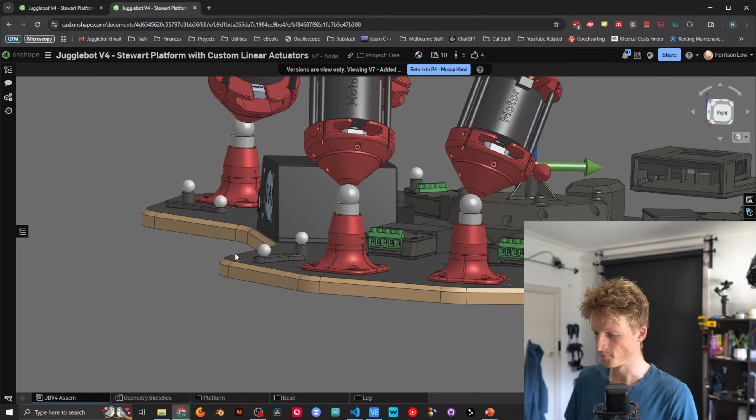And there's one spot in particular where the slop was particularly bad, which was the quick release joints that I had between the leg and the base. And to show you what these were, this is what they were like before. Well, actually what they currently still are now. So on each of the legs, I'll explain why I decided to do this in a sec, but

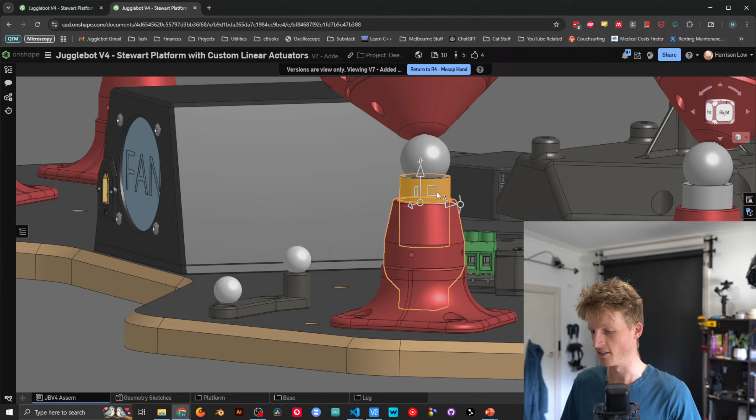for now, these legs are all attached with this magnetic joint that attaches the leg to the base, and then to attach the female part of that magnetic joint, I've got a little holder thing in here, and then that attaches into the actual base with just a single screw, which the hole is around here. So through there, a bolt goes in, and then attaches this guy down into the base.

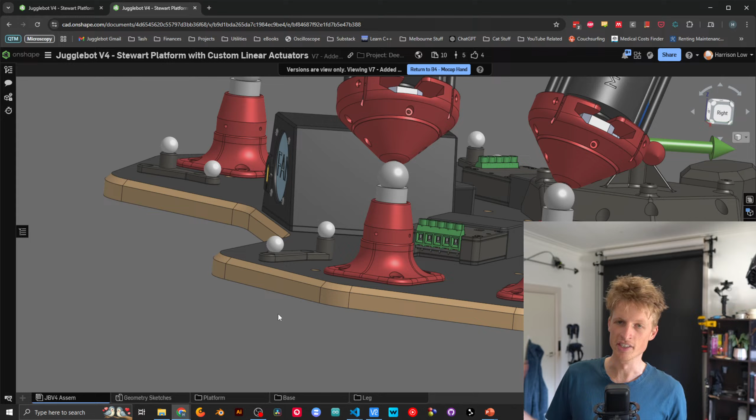And so the reason why I did this initially was because a little while ago, probably almost a year ago now, maybe even more, the geometry of the robot was changing quite a lot. So I was relatively frequently changing where the legs were positioned and how they were attached, and also changing the geometry of the platform itself. And because I was going through all of these changes, it was really annoying to have to continuously screw and unscrew a whole bunch of different spots.

And I wanted these legs to be able to come in and out much faster so that I could more easily make those changes. But of course, there's been so many instances where previously I was designing something specifically for modularity, but as soon as I got the modular design done, I stopped making changes, which is so frustrating.

Yeah, I kind of wish that I did the modular design at the very beginning, and then I could actually benefit from that modularity, and then at the end, once I settle on a design, I ideally would have come up with a rock solid final idea. I guess that's just the way it goes though.

So yes, since I made these joints, I haven't done anything with them. And perhaps unsurprisingly, because there's only a single bolt attaching these guys into the bottom piece, there is a non-zero amount of slop in there. And of course, because these are all 3D printed parts, in here I've had to add a little bit of tolerance. So particularly wobbling about this axis through here, there's a little bit of jiggle in there.

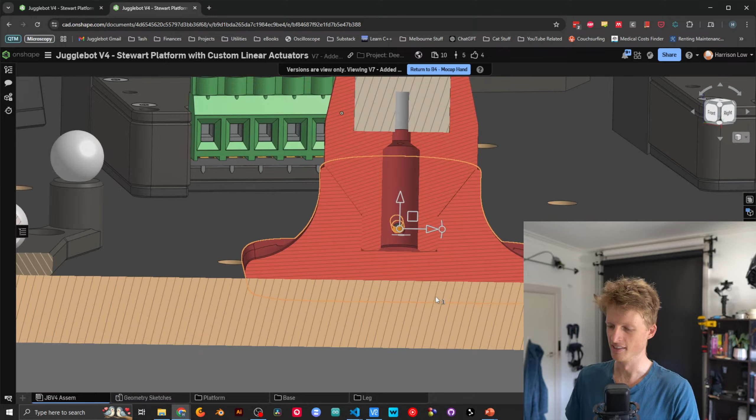Yes, that's no good. So I am now replacing them with these guys. And it's essentially the exact same thing, except this is all one solid piece now. So if we have a look at the cross section, we bolt straight through the red piece, the printed part, into the female magnet bit, and then that goes straight onto the base. And this should be a lot more solid.

I haven't changed these over yet though, because my printer is slow and it takes a bloody long time to print these all off. So I've already got 5 of them, and the 6th one is printing right now. I apologize if you can hear it. I was trying to get it done before the stream started, but again, my printer is very slow.

So yeah, later today I'll replace these over, and we will hopefully be, maybe not completely, but more rid of slop than we were before. As far as I can tell, these are the biggest offenders now, but they are still way less than the platform joints were before. So in that regard, definitely progress.

But I'm not actually too sure how big of an effect this slop is going to have on the testing that I'm doing right now, because all the testing involves moving the platform to a given spot, pausing there for a bit, waiting until we're certain that the platform's not moving anymore, and then continuing to the next pose. So I'm not sure how much slop would actually affect these results, but it definitely would affect the dynamic results. But yeah, I think that's definitely a step in the right direction.

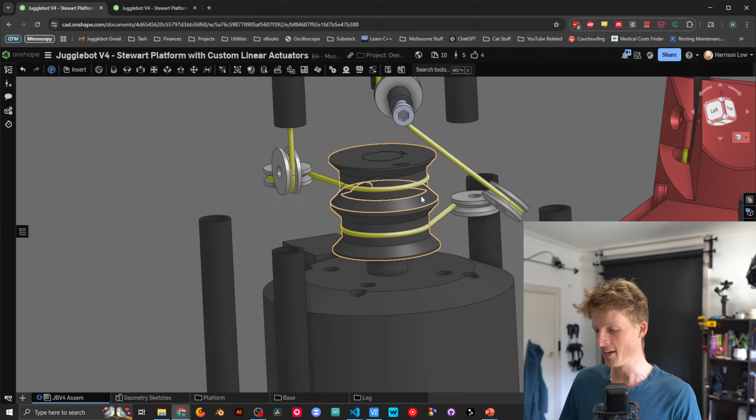Although I haven't gone through and updated this yet. Actually no, I did update it. Yeah, this is correct. So this spool is nominally 22 millimeters in diameter, according to the CAD. However, the effective diameter that the string actually follows is going to be slightly larger than 22 millimeters, assuming that the spool actually is printed to be exactly 22 millimeters.

The effective radius is a little bit larger because the string itself has some size. These strings are nominally 0.8 millimeters, so it's not very much, but they still have some size. You may also wonder if the string ever bunches up on itself to increase the diameter. As far as I've seen, that never happens. There is enough width in here to fit the entire stroke length of the legs so the string never coils over itself. I've watched them pretty carefully, so I'm fairly confident that's okay.

But in any event, the string itself does have some thickness. And originally I didn't pay too much attention to this. I just thought, whatever, it's 0.8 millimeters, that's nothing, it's not gonna make any difference at all. But after working with the hand mechanism now, which operates on a fairly similar principle, where are we? Over here.

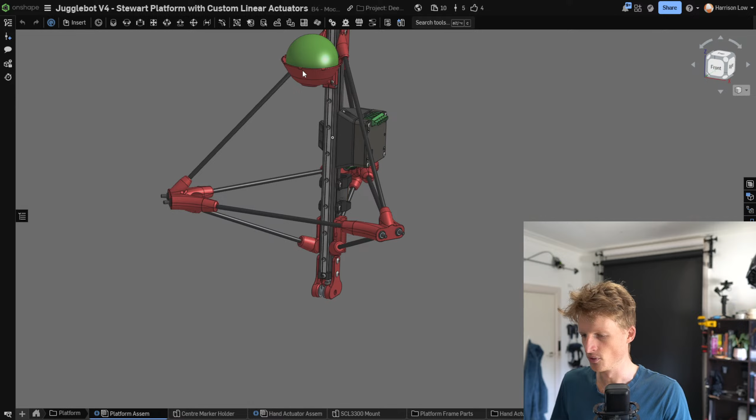But then if we experimentally derive what that effective diameter is, the hand moves in a much more controlled, better way. The way that we have done that experimental derivation, if you can call it that, is to basically connect the ODrive to the computer so we can read out the ODrive's position in revolutions. And then move the hand right down to the very bottom, see what that measurement is, let's call that 0 revolutions, and then we move the hand all the way up to the top, which in the hand's case is a known length.

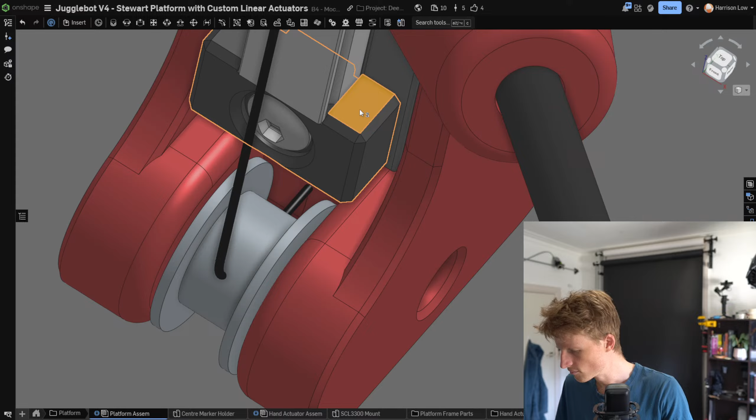We can see in the CAD exactly how long this linear rail is, which, as I said last week, is the only thing that we actually know for sure regarding the platform. So we can say this distance here is, let's say, 359 millimeters. And then we look on the ODrive, and the ODrive says I've moved 11.2 revolutions, or whatever it is. And from that, we can divide the revolutions by the number of millimeters, and know for sure what the effective conversion is between revolutions and millimeters for the hand.

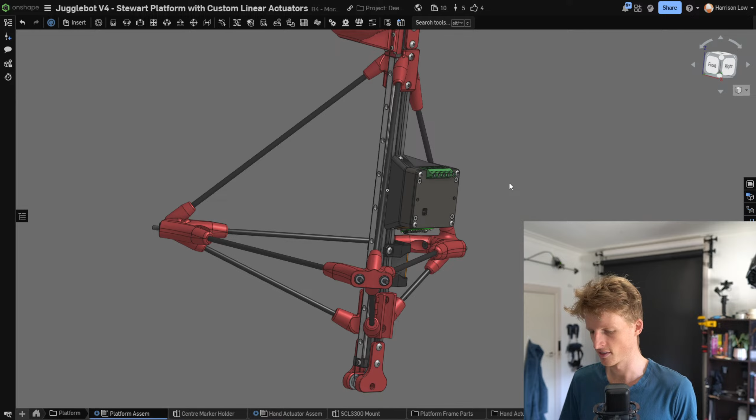And that works very nicely. That has allowed us to control this hand much, much more precisely than just assuming that the spool is the diameter that it's supposed to be. Unfortunately, I can't.

What I want to do is that exact same process, but for the legs, because up until now, I've just been assuming that all of the spools are exactly 22 millimeters in diameter, and taking what I've learned from the hand, that's definitely not correct, and it's probably going to lead to some issues with controlling how long the leg actually is. And this is fairly important. If we want to move the leg to be 200 millimeters extended, and the mapping between revolutions and millimeters is wrong, it might end up going to 205 millimeters or 195. And that's obviously not good.

But annoyingly, unlike with the hand, where we know exactly how long this linear rail is and can use that as our number of millimeters traveled, I have no such benchmark to go off of with the legs. All of these carbon fiber tubes were actually not cut by me. These were cut commercially, so I do trust their length fairly accurately. But on the bottom of all the legs, not shown in the CAD, I have a little foam piece, and that is squished to different levels for all the different legs. So I don't know how big that is.

And even then, when the leg is fully extended, I don't know if this will play very nice. Let's go up, down. When the leg is fully extended, oh, come on. It just contacts these rollers. This red part just contacts the rollers, and I don't know exactly where that contact point is going to be, especially because these rollers are made of TPU and they flex a little bit. It's all a little bit hazy.

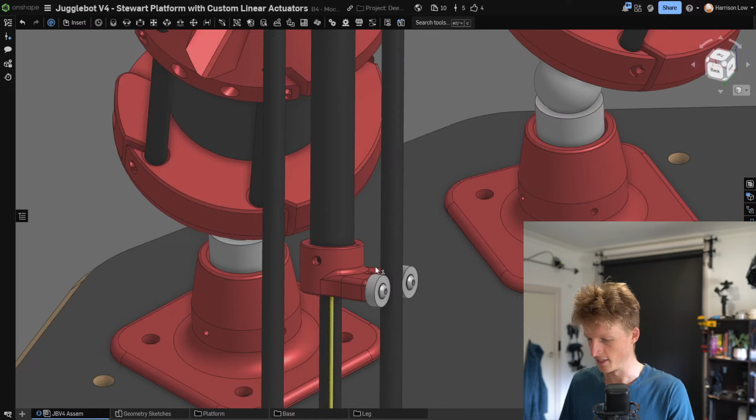Interestingly, I guess maybe expectedly, all of the legs actually have very slightly different conversion values. So I don't know exactly why that is. I guess maybe the spools are printed slightly differently. There's another thing that I'm a little bit irked about. The way that the string path goes in these legs is, the one that pulls the leg to be longer goes around the spool as you would expect, up through this carbon fiber tube, and then up over this printed black pulley, and then down. It's not actually in the CAD here, but it attaches to this hole in here, and that pulls the leg up.

This spool here is printed, and originally I just assumed it didn't make too much of a difference if that was not perfectly circular, but I have since realized that it does make a difference, and if this is slightly elliptical, then that will affect how the leg gets pulled up, which is a bit annoying. And that could be a reason why all of the legs are slightly different to each other. I don't know the precise reason, but I think there's a couple spots where this difference could be arising.

So just looking at comments, Stormy says, having a solid reference point is important for calibrating these things. Nice to hear you found a solution that marries a real-world object with the CAD and real-time math. I have a feeling it'll be more variable when the spool is filled versus empty. A slightly non-linear mapping, but it's a start. Yes, I agree.

It'd be awesome if I could take different mappings at different lengths, like move the leg to a quarter of the way along, and then half, and then 3/4, and then the full length. That'd be great. But unfortunately, I can't think of any way to do that with the things that I have on hand. Yeah.

Yeah, cool. So, as you may expect, I have gone into the code and I've changed these for all of the legs. And we can see whether this actually makes any difference at all. So up here in the corner, I've been doing a test square pattern where I've realized as I was putting this PowerPoint together that I should change this around, but the way that I've got it right now is that this point is 0, 0, and then we go to 100 millimeters in the X direction, 100 millimeters in X and Y, and then 100 millimeters in Y, and then back to 0.

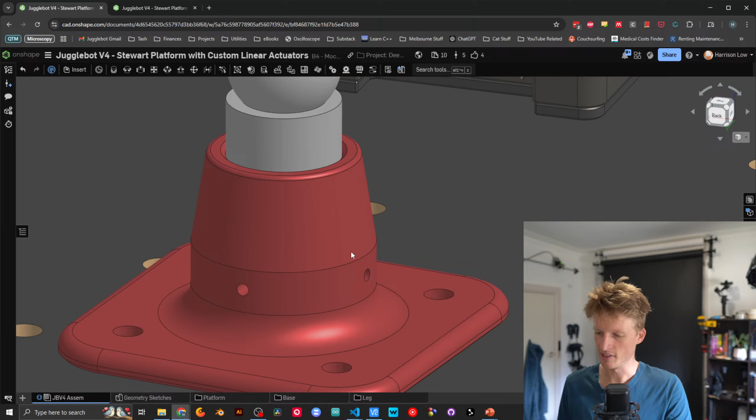So first question is, how many variables are there here? How many unknowns do we need to solve for? Well, there are the attachment points of all of the legs, because these attachment points, while I feel pretty good about them, especially these new ones where this female magnet part is much more solidly mated to the part that actually attaches to the base, there could be some deviation in here. Maybe this is a millimeter off to the side from where it should be. I suspect these errors should be pretty small, and I'll talk about that more in a bit. But they could be a little bit off.

So there's the XYZ position of all of these ball magnets. They could be in a lot of different positions, with some level of error. So that's 18 unknowns, XYZ for all of them. We also have the same thing for the platform nodes. And again, I feel like these should be pretty good, because these are these joints up here, more specifically,

I can pull up this sketch. So it's these. Oh no, that's not it. Oh, I don't know where I've got it.

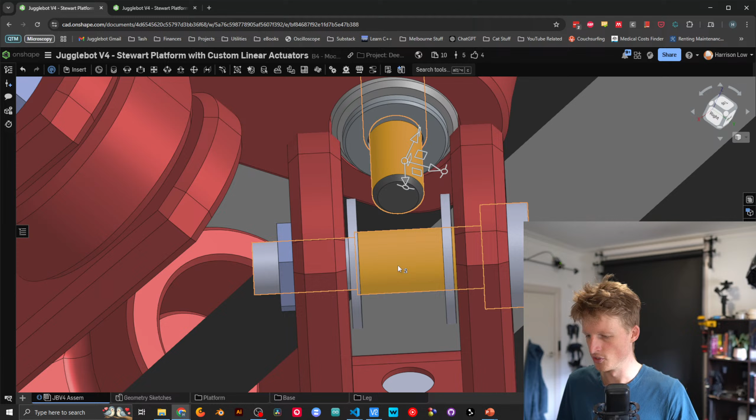But it's basically the center point of where, if you imagine an axis going through here and an axis going through here, it's where those two axes meet. And to be honest, it feels like that should be pretty good. But again, it could be a millimeter off in any direction. And this is also in the platform frame of reference.

So if we were just looking at the platform and we had the origin of the platform, which is around where my mouse is now, from that point, where are all of these platform nodes? Again, it feels like they should be pretty good. But we still don't know for sure exactly where they are, so we should consider those as unknowns. X, Y, Z for all of them is another 18 unknowns. We also have the fully retracted length of all of the legs.

So let's just look at the leg, because the CAD's going to go crazy. So this is the length. Is this not? Lol. Oh, I haven't done it since I've changed this. Let's quickly mate this. No, not sideways. I like that it does that sometimes. All right. So that is the length of the leg when it is as retracted as it can possibly be. So if we stop this from moving side to side, it is this length here.

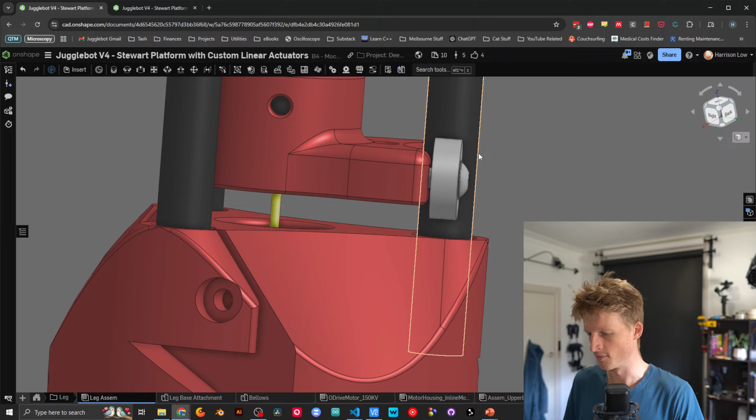Except you've got to remember that I have a little foam piece in here so that when the leg goes through its homing sequence and it rams this down, we don't just have a super hard impact, and it can be made less abrupt, let's say. So I don't know exactly how tall each of those foam pieces are, so that makes it a bit tricky to just assume how long that is. This is one of the variables that I am the least confident in, because all of these legs have slightly differently compressed foam bits, so they could be slightly different to each other.

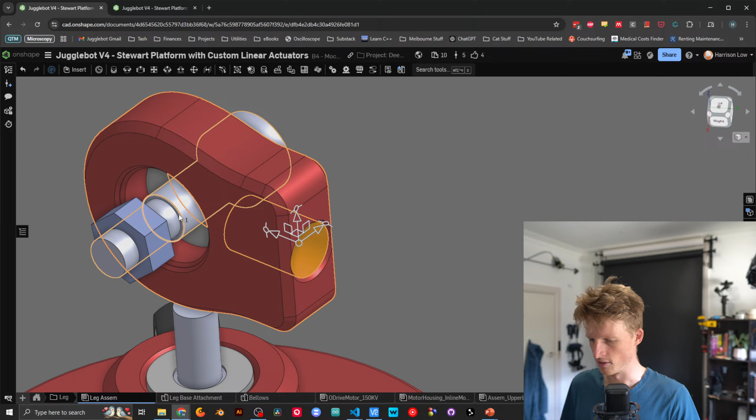Also, just for full clarity, that fully retracted length is the length from the center of this magnet up to the center of those two axes that I showed before. So imagine the center of the axis that passes through here and the one that passes through that point in there. So that length in there, when the leg is fully retracted. And let's unfix this so I don't forget later. All right. These are another 6 unknowns, so each leg could be differently retracted. So that's another 6 unknowns.

As I said before, while I am feeling a lot better about this mapping between the leg revolutions and the millimeters traveled by the linear actuators, I'm not 100% sure that that value is correct, because my whole ruler thing, while it felt kind of good, was not super solid, especially to multiple decimal places. It's not micron level precise or anything like that. So I'm going to consider these still also unknowns.

So that's another 6. So in total, we have 48 unknowns here, which we need to find the optimum values of, so that when we move the platform to a given spot, it actually goes to where we want it to. Which is a lot of unknowns. For reference, I've been doing a lot of study in various optimization algorithms this week, and pretty much everyone suggests to start with super basic problems.

Like, there's a knapsack problem where you've got objects that have a value and a weight, and you want to figure out exactly which objects you should pick so that you optimize your values, given that you have a limit on how much weight you can take. And like, oh, that looks so good. It's like two variables, weight and value. Like, oh, nice. And I had a bit of a look into those, but I don't know.

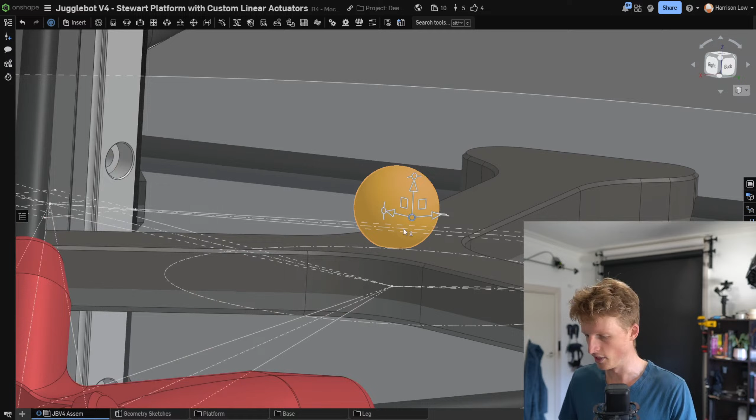In the motion capture software, I originally left the origin as this marker here. So that point is actually, what is it? The center distance is 13.3 millimeters above the actual origin. I'll talk about that in a bit. So the platform one is off a little bit, and also the base one is off a little bit. Let me actually change to this one. So this is the robot as it actually is right now.

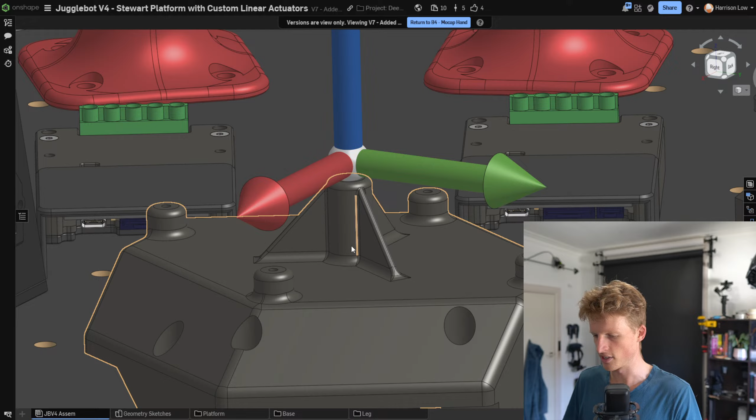This piece, I am still waiting for it to be made by JLC 3DP, so I don't actually have that yet. Instead, I have the kind of truncated one that's flattened off here, and all of the markers are just attached straight onto this guy. So in that case, the origin is off by 35.8 millimeters minus the radius of the marker, which is 7 millimeters. So it's about 28 millimeters below. Sorry, the actual origin is about 28 millimeters above where the motion capture origin is.

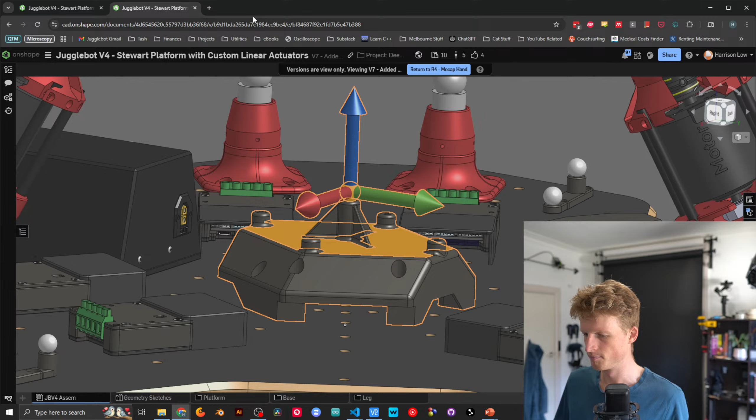Yep. I have been dealing with that by basically telling all of the algorithms that I am using to optimize this robot geometry, I expect all of the base nodes to be offset by 28 millimeters from where the motion capture thinks it is. And similarly for the platform, I expect the platform nodes to all be 13 millimeters below where the motion capture says they are.

I am not sure if that's, yeah. I'll continue on that line of thought in a bit. But that's what I was doing originally. And that's what those first 60 and 108 calibration pose datasets, that's what was set up in those cases. So I'm just saying that just in case anyone wants to try to optimize this themselves so that you know exactly what those data sets were.

And yes, I'm trying several optimization techniques. So we're dealing with least squares, the TRF, and dogbox. These are both variants of the least squares algorithm. Also doing min TC, which I can't remember what the TC stands for. Also differential evolution, which seems like a pretty good way to do it. This is the one that I understand the most, so I'm going to try to explain it a bit.

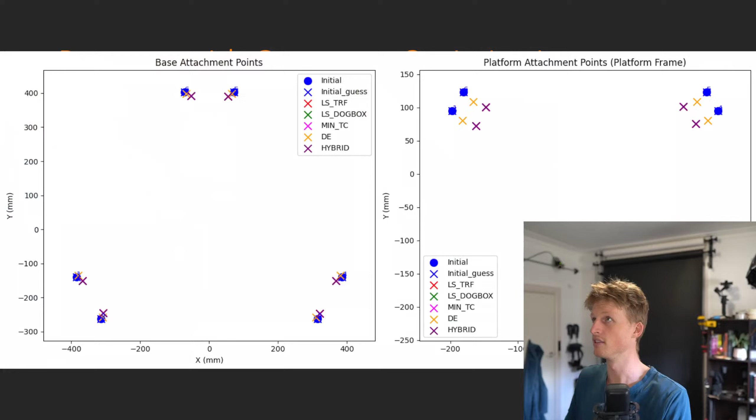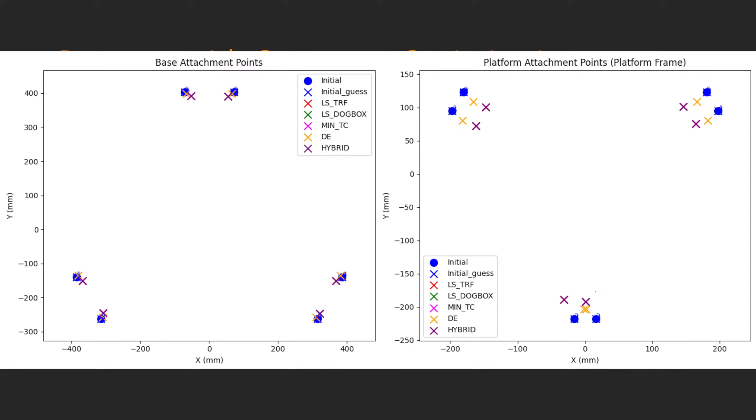So as I expected, that solution is definitely not correct. The fact that these are where they are is a big indicator that something's wrong here. But I don't really know how to improve it. None of these make sense. Everything's a bit whack.

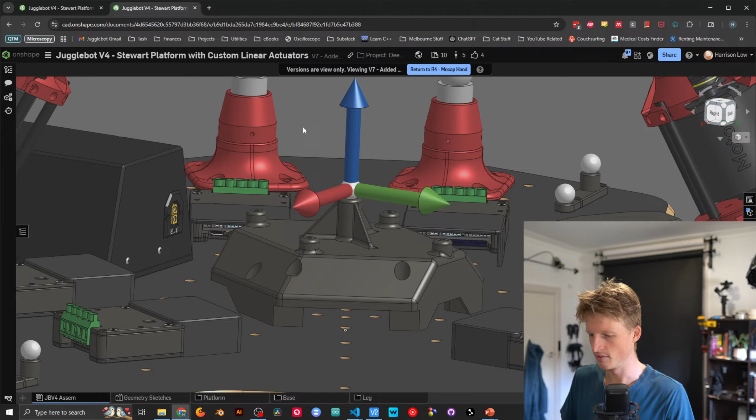So what I did is I said, okay, cool. Maybe it's the fact that, according to the motion capture, my rigid body origins are not actually where they're supposed to be. So let's just record another 108 pose sample. But this time, in the motion capture software, I've offset both the base origin, which is the global origin, and also the platform origin, so that the motion capture origin is actually at the platform origin.

In QTM, you can just say, I want this rigid body origin to be positioned so that whatever marker I choose, in this case I've chosen this one, is at these local coordinates. And I've done that so that the platform origin in the motion capture system is actually where the platform origin is. Before, I was setting bounds to give a bit of error. In fact, it was 13 millimeters below the motion capture origin.

So I was telling all of these optimizers, I expect all of the platform nodes to be between 10 and 16 millimeters below where they're measured to be.

And yeah, I was talking with ChatGPT a bit about this, and it was saying that if you have a systematic offset like this, when you're using these sorts of optimizers, you should really try to separate these things, and rather than trying to fit to this systematic difference or offset, it's ideal if you can resolve that systematic offset before you feed your data into these optimizers. And that way in the optimizer, I can just say, I expect the error to be within plus or minus 1 millimeter, rather than plus 10 and plus 16 or something like that.